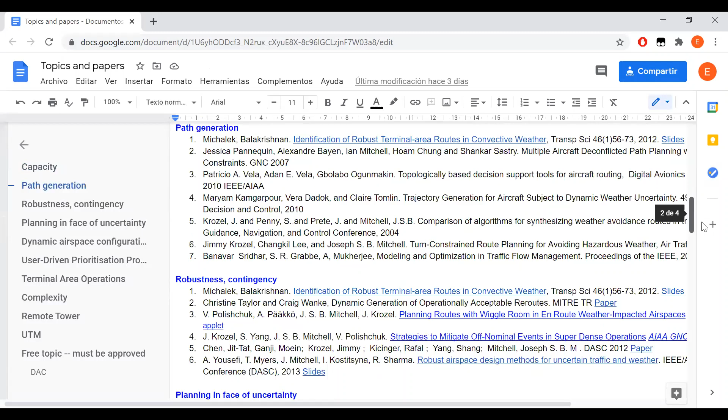This is the list. I'm gonna share the list with you so you can see it. So this is the list of topics, and for each topic we have a list of articles that you can choose from and read whatever interests you the most - capacity, path generation, robustness, etc. Okay, so you have this list with all the information.

And what I want you to do is to choose a topic and read some articles on that topic. And you must formulate a new optimization problem related to the topic. So this is the big part of this project. You will have to be creative with your problem. You have to come up with a new problem and formulate the optimization problem, etc.

So read about the topic, read a bunch of papers. You can, of course, be inspired by other problems to come up with your own, maybe making some modifications or adding new things. So yeah, come up with a new optimization problem and write your assignment about it.

So the new optimization problem that you choose or come up with must be relevant to ATM, of course. It must be based on the articles that you read. And if it's a small problem or something that's not very realistic, but that makes sense, that's okay. We are not expecting you to come up with a big project or anything. Just find something relevant to ATM and come up with an optimization problem about it.

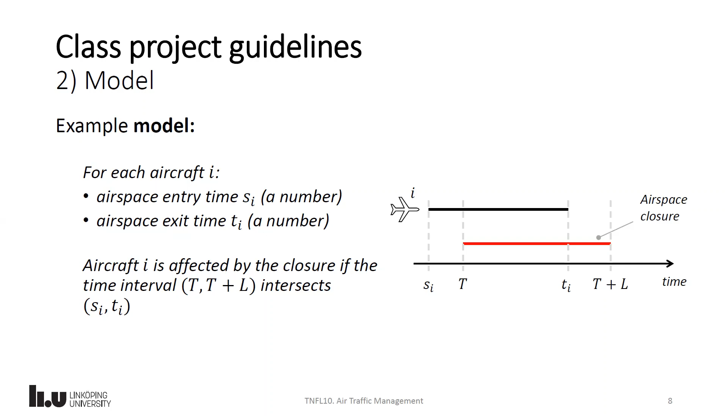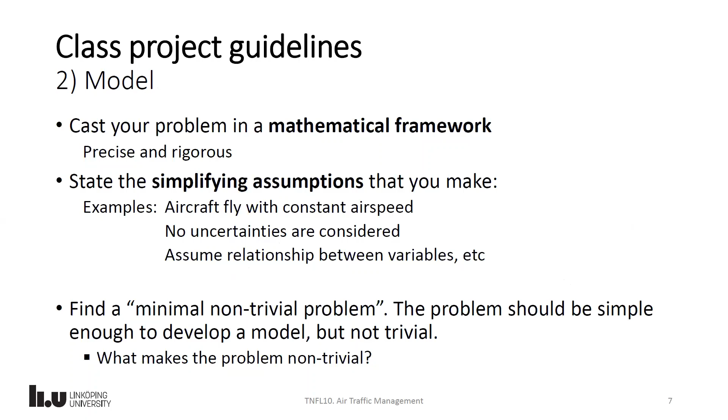Then we have the third part, which will be the problem statement. This is like the most important part of your project. Of course, the others are important too, particularly this one and the introduction. But the problem statement, because we spent a whole class talking about this, I expect you to do it very well. And also you have practice with homework too.

So this is an important part of the assignment. The problem statement is what we discussed in class already: the input, what kind of objects are given, any assumptions on the input. Then we have outputs, constraints, and objective function. All that we discussed last week.

You should build your problem gradually. You have two approaches. One would be to do what we did last week and start with a simple statement and build up from that. Another one is you can come up with a very difficult problem and start simplifying it. I find that this second thing is usually more common, to think of a very difficult problem, because ATM is a complex environment, so you always have to make simplifications in order to solve things.

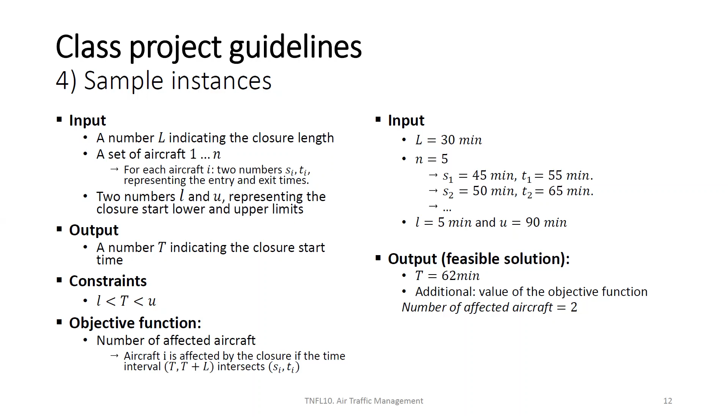And this is the example that we saw the other week, so I'm not going to talk much about it. Then we have the solution suggestions.

What would you suggest to solve the problem? What optimization techniques would you use? Of course, you don't have to solve your problem. That's something that in most cases is very difficult, so we don't expect you to do that. And also look at papers for ideas.

If you are basing your project on one or two papers, the most normal thing that will happen is that those papers already use optimization techniques. So you can suggest using those in your problem as well. This is not graded, because we haven't seen much about this and we have not worked with this. We are not going to grade your assignments on this, and you can skip this section entirely. And of course, crazy ideas are okay.

And finally, you must include the differences from the literature. First, on the model: how is your model different from those considered in the literature? For example, maybe in the literature the model is stochastic, but you simplify it and use a deterministic model, or dynamic versus static, etc. How does your model change from the article that you choose to base your project on?

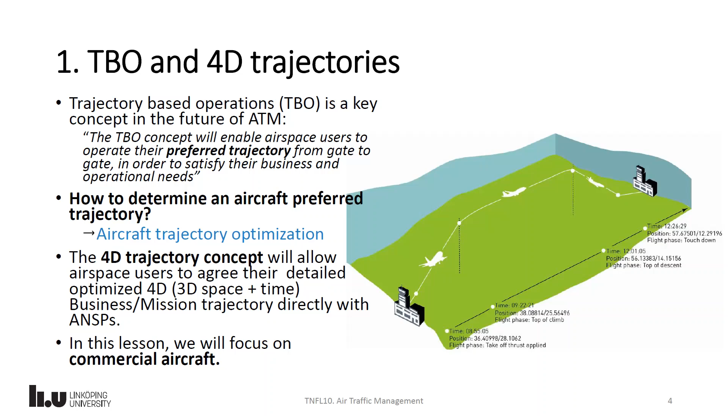So let's talk a little bit about flight mechanics. What is it and why is it important to aircraft trajectory optimization? Flight mechanics is the application of Newton's laws to the study of aircraft trajectories, which is also called performance, stability, and control. So how does the aircraft move? Equal to how we would apply Newton's laws to any kind of object on the ground or anywhere else. If we focus on aerial vehicles, we're talking about flight mechanics.

And flight mechanics in general includes also things like rockets, gliders, helicopters, all those kinds of aerial vehicles. But as I said, in this class we're going to focus on commercial aircraft. And there are two main parts of flight mechanics.

The first part—I'm going to start with the second one. The second one is stability and control, which is the study of the motion of the aircraft center of gravity relative to the ground and to the motion of the airplane. So this one is not so important for us. This is important for designing the aircraft and such.

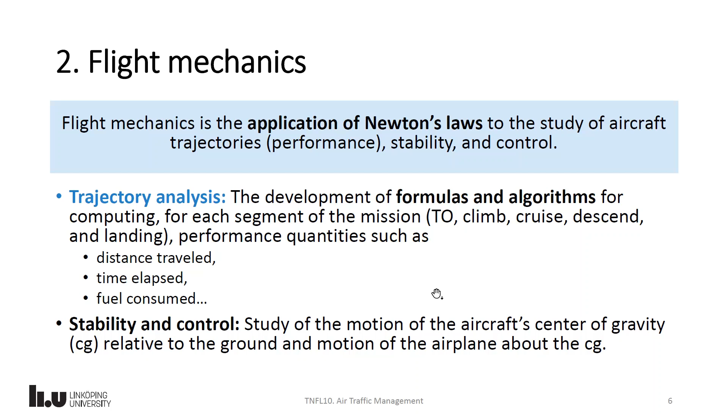And we have something in flight mechanics which is the point mass equations of motion, which gives us a relationship between the aircraft state—which is the position of the aircraft, the velocity of the aircraft, and the mass of the aircraft—and the forces affecting the aircraft.

In the context of our class, what we want to do is to formulate optimization problems. What flight mechanics would do is give us the model for the optimization problem and also give us the objective function. So if your objective function is the fuel consumed, for example, if you have a problem whose objective is minimizing the total fuel, your objective function will have to be constructed using tools from flight mechanics.

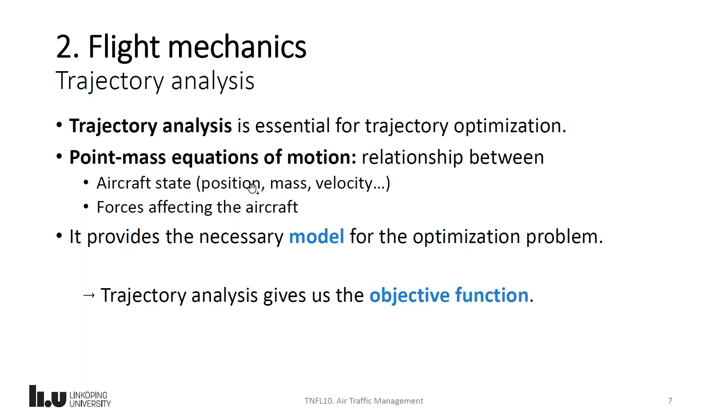Then you have the atmosphere model, because aircraft behave in a different way depending on the atmosphere they are in, depending on the temperature, the pressure, etc. In general, there is something called the International Standard Atmosphere that is used, but it can be any other atmosphere model that is needed. And then we have the aircraft model, which gives us an idea of how the propulsion works in that aircraft and what the aerodynamics are of that aircraft.

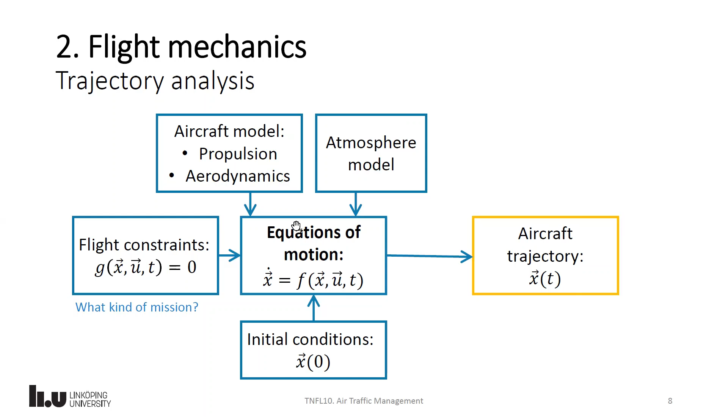So with all these four information boxes we have, we feed them to the equations of motion, and through integration we obtain the aircraft trajectory. This is a very complex topic, with a lot of equations, physics and mathematics, so it's not something we can cover today, but I just want you to know that this model of aircraft exists, and that this is what is behind aircraft trajectory optimization.

So just to give you an idea of how flight mechanics work, I want to give you some little concepts. Of course, this is not the subject of this course, so if you want, you can disconnect a little bit, but I think it's nice to know if you ever encounter this. In flight mechanics, the aircraft is considered a point at the center of gravity, which has 3 degrees of freedom, and there are 3 main forces that affect the aircraft.

The first one is the aircraft weight, which points toward the earth. Then we have the thrust of the engines, which goes in the same direction as the velocity of the aircraft. And also we have the aerodynamic forces, which allow the aircraft to fly. We have the lift, which is the force made by the wings going upward, and this is the force that keeps the aircraft in the air. And then we have the drag, which is the resistance of the air, basically.

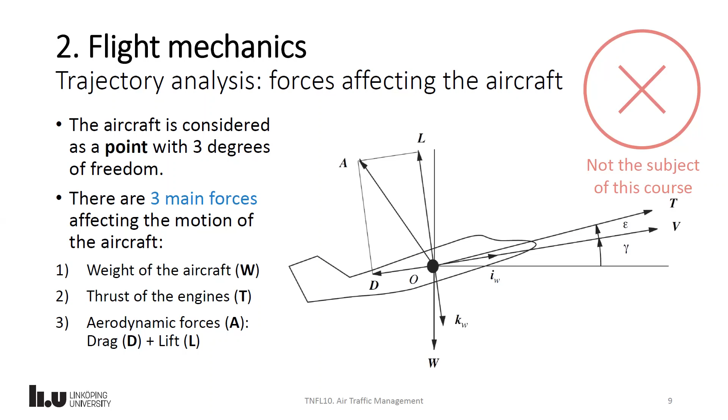If there were no drag at all, an aircraft could fly without stopping, the same as a car. I mean, we have a force that is making the aircraft slow down, so we need the thrust of the engine to counteract that force. So these are the 4 forces that affect the aircraft, and using the equations of flight mechanics, which look something like this, we can obtain the positions, the velocities, the orientation of the aircraft, and the weight, with these expressions.

Of course, this is not the subject of this course, but I want to give you an idea of what this kind of material is useful for. So if you, for example, want to know how far we are going to travel given a certain amount of fuel, you will have to integrate these equations in order to obtain that performance variable.

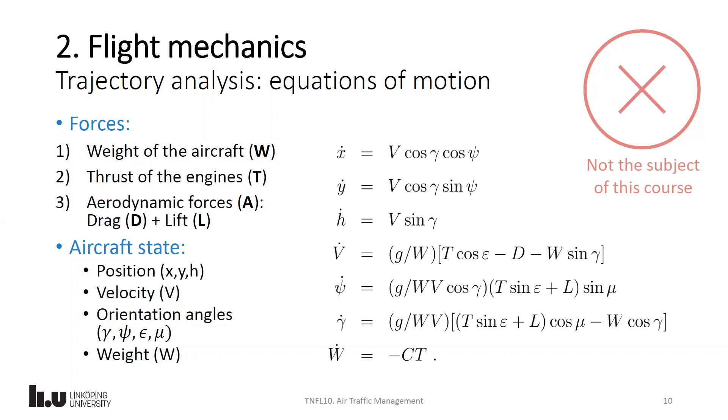So using flight mechanics, we can answer optimization questions like, for example, given a particular aircraft, a given atmosphere, and given initial conditions, what is the maximum distance we can fly given an amount of fuel? That's one optimization question we could formulate. Another could be, given an amount of fuel, what is the maximum time an aircraft can spend flying? Another optimization question could be, given a distance between 2 points, what is the minimum amount of fuel necessary to fly that distance?

Or, for example, given 2 points, A and B, what kind of mission, in general defining the velocity profile and the altitude profile, must the aircraft maintain to fly from A to B with minimum fuel? So all these questions can be answered through flight mechanics, and it's going to give us a model, an objective function, in order to answer them.

Another optimization question could be, given a particular mission, what kind of aircraft can fly the mission the fastest, longest, or with the minimum fuel consumption? This question falls into the realm of aircraft design. For example, to design the aircraft, we have to take into account the takeoff weight, the engine size, or the wing size. So which kind of aircraft is going to be the best for a particular mission? That is something aircraft design has to work with.

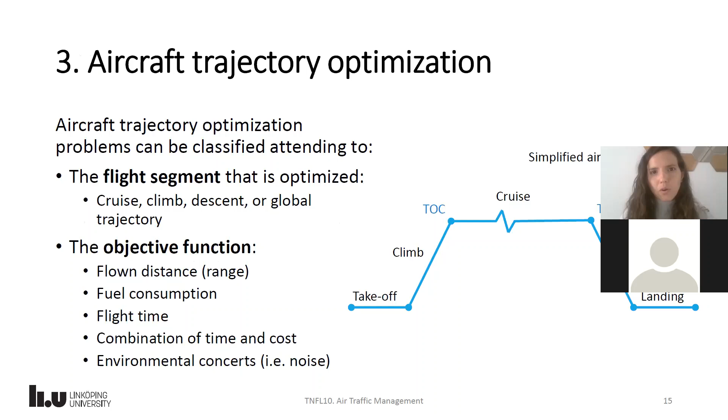Then we have aircraft trajectory optimization. So we can classify different trajectory optimization problems depending on whether we are in one flight segment or another.

In general, we can separate these 5 different segments, which are first takeoff, the climb, the cruise, the descent, and the landing. These points over here, the TOC, top of climb, and the TOD, top of descent, are points that I think we are going to be hearing a little bit about them.

They are the highest point of the climb, after which comes the cruise, and the top of descent is the higher point of the cruise, after which comes the descent. So basically the beginning and the end of the cruise segment.

Usually when we talk about trajectory optimization, a lot of work focuses on the cruise, some of them focus on climb and descent, and we don't focus on takeoff and landing. Why not? Because takeoff and landing take a very, very small part of the whole aircraft operation.

So if we want to optimize the use of fuel, we're going to be focusing more on cruise, climb, and descent than on the takeoff and landing phases. And in particular, the cruise is the longest part of a flight in general. So it's very common to focus our optimization efforts on that part of the cruise, okay? That is why I have this little thing over here to indicate that the cruise is much longer than this.

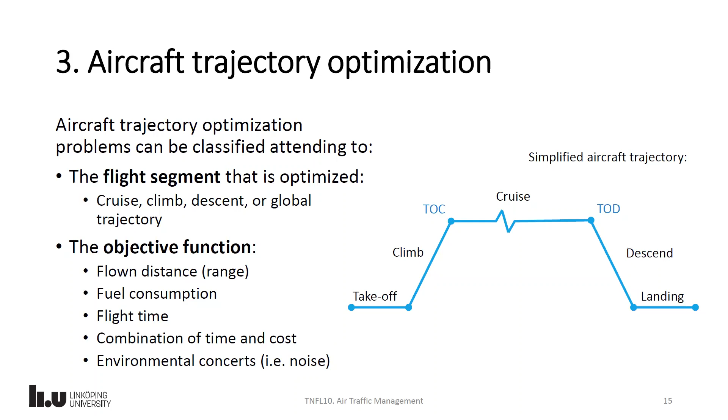So there are 2 main methods to tackle trajectory optimization, just so you know them when you see them. The first one is the parametric optimization theory, in which you take the variables of the trajectory and use them as parameters that can only take one single value from a given set.

For example, some parameters that you can use are the speeds, the altitudes of the waypoints of the trajectory, the angles at given points in both time and space. You can also use the trajectory waypoints coordinates, or the top of climb and top of descent. So just take given variables that describe the trajectory of the aircraft, and those are going to be your decision variables.

Then we have the optimal control theory, in which we no longer have variables that can take one single value, but the output of our problem are functions of time. Using optimal control theory, we can obtain functions like the position of the aircraft or the aircraft velocity as a function of time, and thus are the output of the optimization problem.

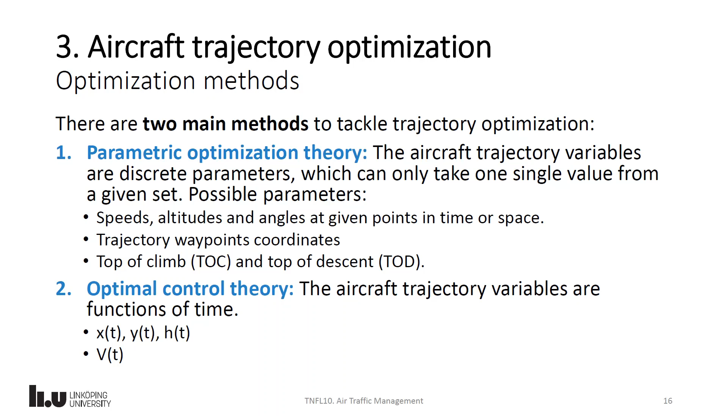If we look at the objective function, the most popular ones to consider are, of course, not the only ones. We saw that we can optimize while taking into account environmental reasons, or maybe flying the farthest. But the more popular ones, I would say, are minimum fuel, which is obvious. The objective is to perform the mission with minimum fuel consumption, and it has economical benefits for airlines and also reduces emissions. So this is a very popular objective function.

The other one would be minimum time. The objective is to perform the mission in the minimum time possible. It also has economical benefits for the airlines, for example in crew salaries, if they have to pay people less for being less time in the air. That's an economical advantage.

Not only fuel, so the cost of a flight does not only come from fuel. It also comes from the crew, and all the taxes that the airlines have to pay to fly over a given airspace. So for example, if an airspace is very expensive to fly on, they may want to fly over a different airspace, even if they pay more for fuel. So not always we try to think of minimum fuel — minimum time can also be beneficial, and it also gives us a better passenger experience. If you make the flights shorter, of course, it's a better experience for the passenger.

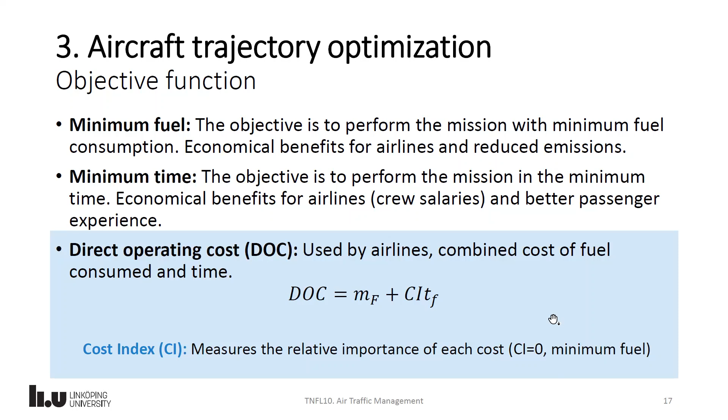The higher this cost index is, the more importance the time flown has on the cost of the operation. So airlines have to take into account both costs, and they try to decide what cost index is more beneficial for them — either they want to spend less on fuel, or they want to mitigate the costs of taking longer flights. This direct operating cost is a very commonly used objective function in trajectory optimization. This is something airlines use to optimize their trajectories, and if you look at research on trajectory optimization, you're going to see this direct operating cost a lot.

So this could be an example of an optimization problem for a single aircraft, using the notation and formulation we used in this class last week. The input of our problem would be a set of parameters and equations that give us the aerodynamic and propulsive aircraft model and also the atmosphere model. Then we have as input a set of equations indicating the flight segments and a vector of initial aircraft conditions. The output of our problem could be anything you can imagine, but for this particular example, the output could be a set of functions depending on time, which are the optimal Mach number and the optimal altitude profiles.

The flight constraints must be satisfied, which are this one over here, and the objective function could be, for example, the direct operating cost. So this is how a simple statement of the trajectory optimization problem in a way that we saw in class. Of course, in here we don't have the model. The model could be something very complicated and would be based on flight mechanics. But this is what our optimization problem would look like from what we saw in class.

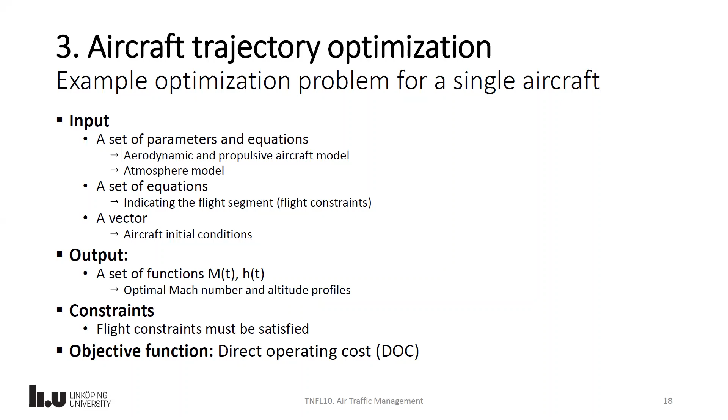Now we're going to see how we can optimize the different phases of the flight, which are cruise, climb, and descent. It has been proven, it's a result in the literature, that if you want to optimize your cruise, the optimal trajectory is something that is called a cruise climb.

From the definition, a cruise climb is a climb technique employed by an aircraft, usually at a constant power setting, resulting in an increase of altitude as the aircraft weight decreases. If you take those flight mechanics equations and optimize the direct operating cost, you obtain that the optimal trajectory for the aircraft to fly is a cruise climb. In a cruise climb, the aircraft is losing weight because it's spending fuel in their engines, and as the aircraft weighs less, it takes an ascending trajectory.

It has been proven that using this kind of trajectory, the fuel consumed and the time that it takes for the aircraft to fly is optimal. But as you can imagine, this cruise climb is very difficult to perform in an operational environment. Usually what is better to control, what is easiest to control for traffic controllers and for pilots, is to fly at a given flight level.

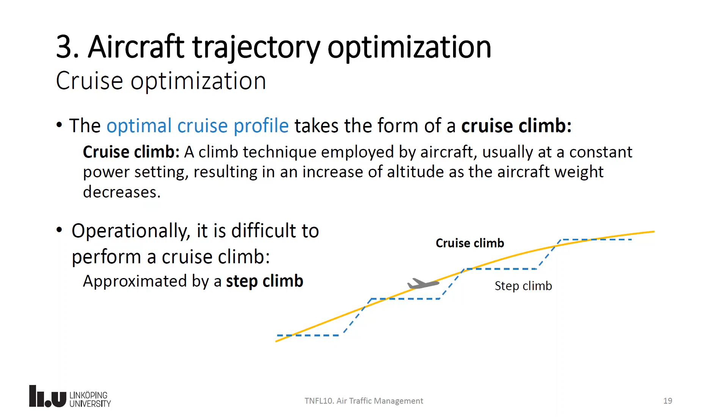So this is for the cruise. If we take a look at the climb and descent operations, it has been proven that the optimal vertical profiles take the form of continuous climbing and descending paths. From ICAO, we have these two definitions. ICAO didn't invent them, but they are two well-known concepts in aviation: continuous climb operations and continuous descent operations. These two are the optimal ways to both climb and descend.

Continuous climb operation is defined as an operation enabled by airspace design, procedure design, and ATC facilitation, in which a departing aircraft climbs without interruption to the greatest possible extent by employing optimum climb engine thrust at climb speed until reaching the cruise flight level.

And on the other hand, we have continuous descent operations, which is similarly defined: an operation enabled by airspace and procedure design and ATC facilitation, in which an arriving aircraft descends continuously to the greatest possible extent by employing minimum engine thrust, ideally in a low drag configuration, prior to the final approach fix or final approach point.

So what this means is that what the aircraft wants to do in order to consume the least fuel, in order to fly the most optimal flights, is to continuously climb or continuously descend. These kind of horizontal segments are not efficient for the aircraft. In particular, in the continuous descent operation, CDO, it's important to notice that the aircraft are going to be flying with minimum engine thrust.

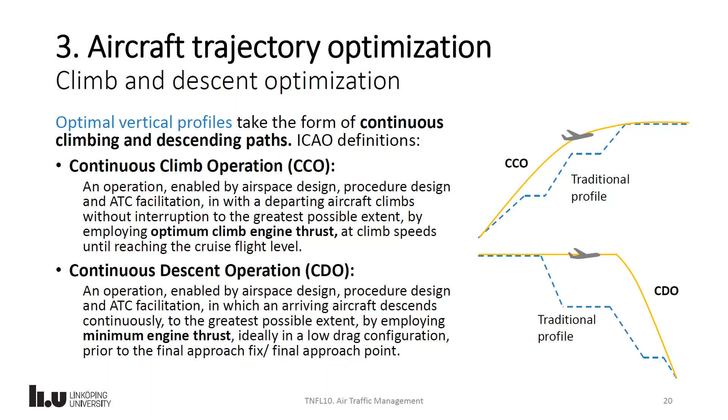Okay, so this is for continuous climb operation and continuous descent operation. These are some of the benefits: more fuel efficient operations, reduction in pilot and controller workload, because if you're doing a step climb or step descent you have to keep communication with air traffic controllers, telling them your flight level and descending points. But with continuous climb or descent operation, you just have to say this is my descent path, and that's it. Then we have a reduction in the number of required radio transmissions, a consequence of communicating positions and points much less.

Reduced fuel burn, aircraft noise mitigation. A potential benefit is that some flights aren't possible because they don't meet noise limitations, so by using continuous descent or climb operations and reducing noise, those aircraft would be able to fly, so more flights could be accommodated. Then we have more efficient use of airspace and more consistent flight paths and stabilized approach paths. These are benefits that ICAO has identified for continuous climb and descent operations.

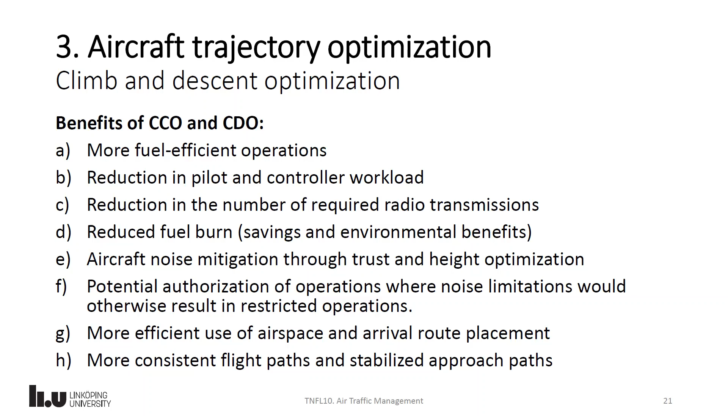So as you can imagine, this is what the ATM community wants to achieve, that all aircraft end up flying continuous climb and continuous descent operations. There was a study done by Eurocontrol in 2018 in all the countries of the ECAC, and they found that for continuous climb operations, 94% of flights in the European area currently fly continuous climb to flight level 100, and 74% fly with full continuous climb operation to the top of climb. These numbers are quite big, 74% of flights flying continuous climb operation is a big achievement, and that's something Europe and SESAR have been working on, and I think it's giving some benefits already.

Then from continuous descent operation, on the other hand, they found this number was much lower. They concluded that 41% of flights fly continuous descent operation from flight level 75, which they identify as the top of noise CDO, and only 24% of flights fly continuous descent operation from the actual top of descent, which they call the top of descent for fuel. So they identify two tops: the lower one, which is the noise one. I assume that over flight level 75, the noise is not too disrupting to the population.

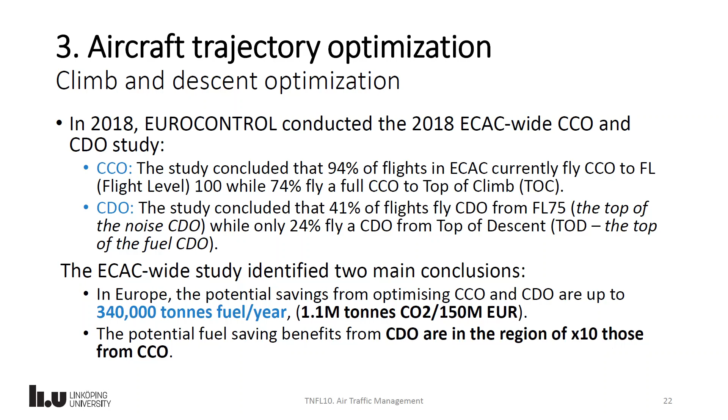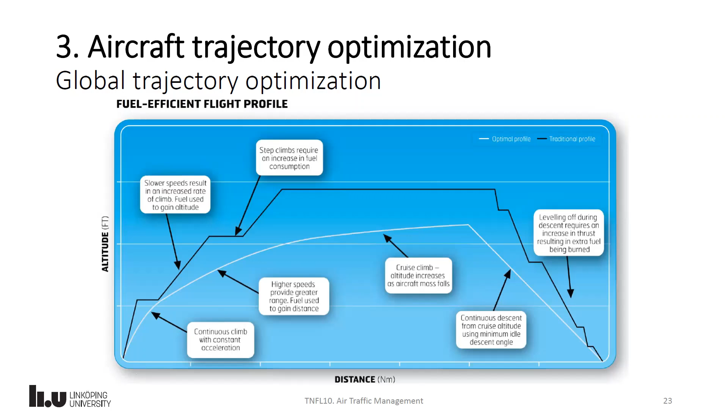Yes, so that's all for trajectory optimization. I'm going to talk a little bit about aircraft conflict detection and resolution, and also about trajectory optimization and their meteorological conditions. These are going to be just a couple of short slides.

As I just said, aircraft trajectories are already optimized. They know how to fly those trajectories. So our task as researchers or as workers in ATM is to accommodate those optimized trajectories to the constraints that the ATM system imposes. And one of those constraints is the conflict between aircraft. So because aircraft do not fly alone in the airspace, we must construct trajectories that are conflict-free.

So I will give you the definition of a conflict. A conflict between two aircraft exists when a set of separation minima is predicted to be violated in the future. That means that we have a horizontal distance requirement, usually named with the letter D, and a vertical distance H.

You can think that aircraft are surrounded by protected zones, and those zones must not overlap. If these protected zones overlap, we say that the aircraft are in conflict. Or if these protected zones are predicted to overlap in the future, we also say the aircraft are in conflict. The work of an air traffic controller is to prevent these losses of separation, to prevent these conflicts from occurring. So aircraft trajectory optimization must take into consideration that trajectories must be conflict-free.

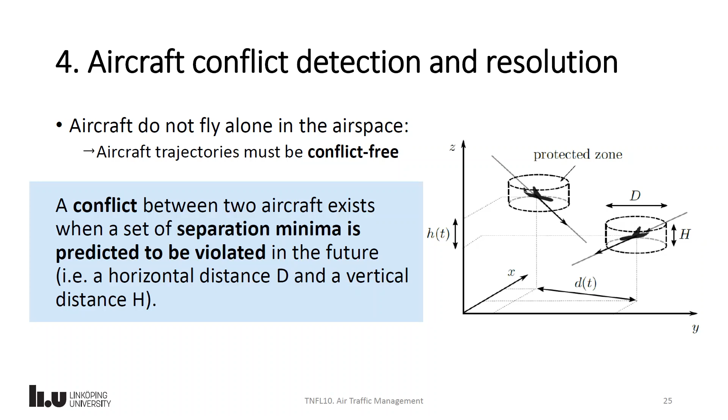But if we want to optimize the trajectories, if we want to fly with continuous climbs, if we want to fly with cruise climbs, we have to take into consideration other kinds of techniques, other kinds of measures to prevent those conflicts.

So this could be an example of the optimization problem as we saw in class, but now for multiple aircraft. The inputs are the same, but we have added a new input: instead of one aircraft, we have a set of aircraft, which goes from 1 to n. The output is the same — we want to obtain the optimal Mach numbers and the optimal altitude profiles for all aircraft. But now we have added a new constraint, which is that the aircraft trajectories must be conflict-free.

And the objective function, instead of being the direct operating cost of one aircraft, is the sum of the DOCs for each individual aircraft. So the most important change we made when considering multiple aircraft is that the trajectories must be conflict-free.

And this is not an easy topic, because in scenarios where there is a lot of traffic demand, or a lot of traffic in general, this can be very difficult, and in some cases it might even be impossible.

So this is where air traffic flow and capacity management comes into play, by delaying some flights or rerouting them. So this is a very relevant topic, to optimize trajectories while also maintaining safety in the airspace by keeping conflict-free trajectories.

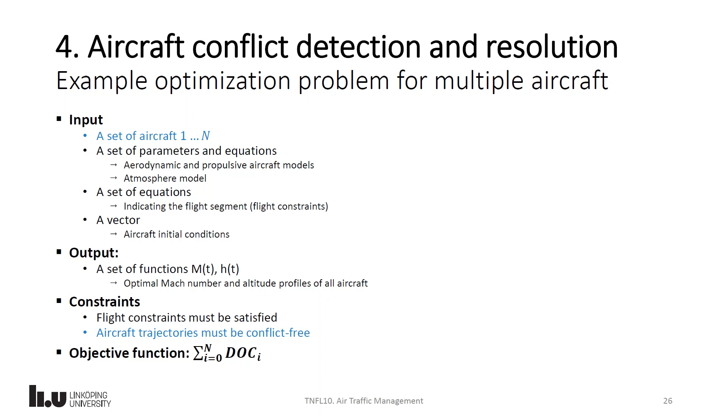This is an example of a paper that tackles trajectory optimization while also having conflict-free trajectories. This example considers optimal conflict-free trajectories in a terminal maneuvering area of an airport. So we have the terminal maneuvering area, depicted with little blue lines, and then we have all the waypoints that are inside this terminal maneuvering area.

So the output of the optimization problem in this particular paper is the coordinates, or trajectory waypoints. So the output is a sequence of waypoints that the aircraft must follow, and the objective function is the deviation from the nominal trajectories.

They consider that the aircraft trajectories are already — if the aircraft were to fly in the airspace, they would have a nominal trajectory that is optimal for them. So what they want to do is minimize the deviation of the resolution trajectories from those nominal trajectories that are already optimal. So they come up with trajectories that are like this, as you can see.

So these little circles — the asterisks are the positions of the aircraft, and the little circles around them are the protected zones. I remind you, if these protected zones were to overlap, we would have a conflict. So you can see that as time passes, the aircraft follow a given trajectory, and we have a converging point over here.

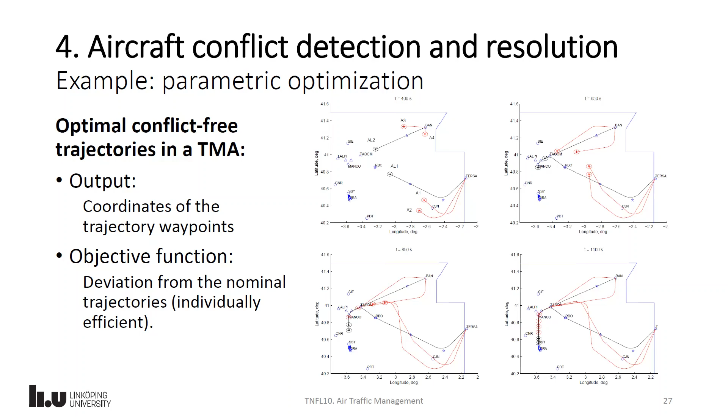And then finally, we have trajectory optimization under meteorological conditions. As you know, weather is very significant in aviation, in aspects like safety, and what we tackle in this lesson, efficiency.

Aircraft trajectories are going to be affected by meteorology, by weather, and there are two main weather phenomena that affect the trajectories. First, we have winds. The winds affect aircraft trajectories by modifying their ground speeds.

So basically, an aircraft has two speeds. First, they have the airspeed, which is the speed of the aircraft with respect to the air, with respect to the mass of air that is surrounding the aircraft. That is what the aircraft feels, what the engines feel, what the engines are working against, the density of that air, the one that's feeding the engines. The velocimeter in the avionic panel is going to indicate that airspeed.

Imagine a boat. The airspeed would be the equivalent of the velocity of that boat with respect to the water. And then we have the ground speed. The ground speed is the speed with respect to the ground, so that could be the thing that we would observe from the ground if we look at an airplane. And the difference between the airspeed and the ground speed is the wind.

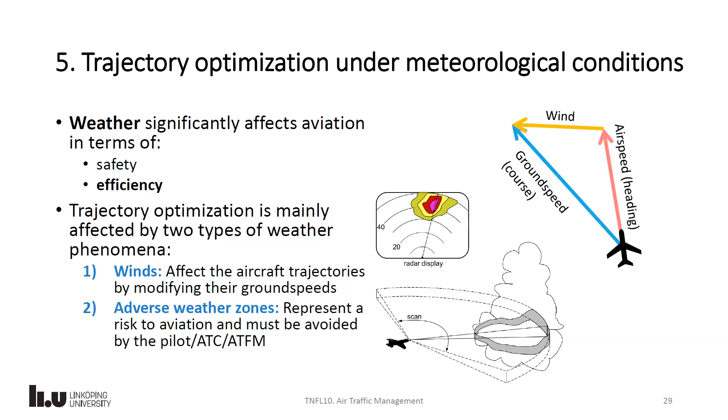So these two weather phenomena affect a lot the aircraft trajectories. Let's start with the wind.

If we try to incorporate winds into our optimization problem, it will come in the form of an input. We will have to consider not only the atmosphere and the aircraft models and the equation of the flight segment, etc., but also as an input we would have to consider the wind map, what the wind looks like, what the wind the aircraft is going to encounter will look like. And this wind needs to be incorporated in the model, so the direct operating cost must take into account the influence of the wind.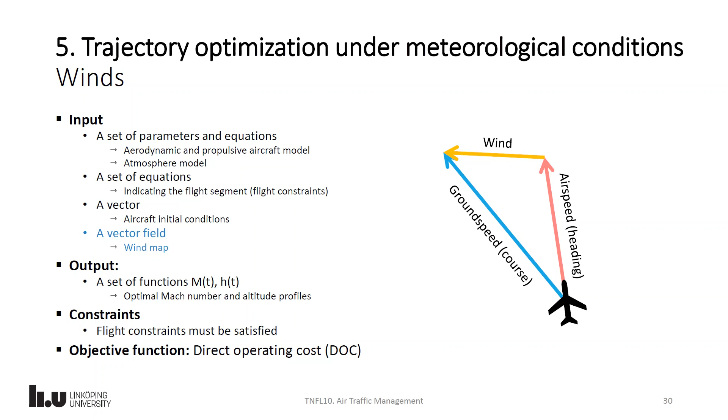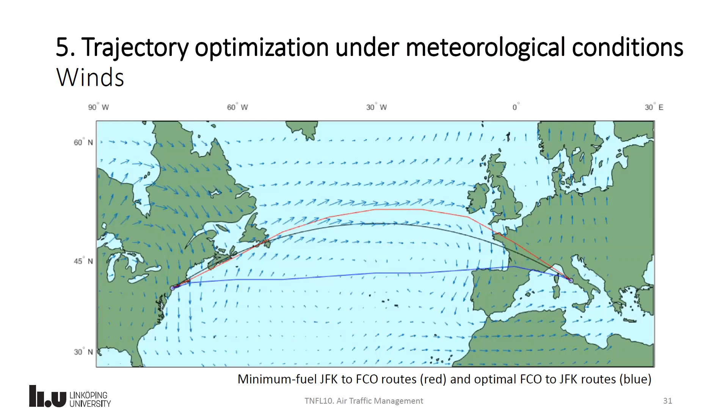How to deviate from those weather cells is again something that is not easy. It's a topic that is being researched now. If you want to know more, just go to the bibliography or ask me about it. There's a lot of research done around these topics about weather in general in aircraft trajectories.

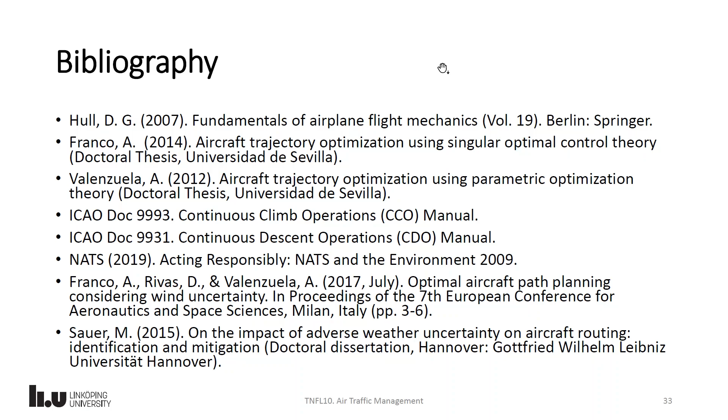Okay, I guess that means you don't have questions and everything's great. Do you have any questions about the project or the homeworks? Not now. Do you go first, Erik? No, I just said I don't have any.

Okay, so we can't do, as you said, anything from what we did in homework 1. So we have to find a subject that isn't made up of any of the persons in our group from homework 1 in the group project. No, it mustn't be the same problem, but you can work around that topic. So if you worked on, say, TMA in homework 1, you can still work with that topic. What you cannot do is use exactly the same optimization problem. You can add to that problem, make some simplifications, or just make something new. You can use the same topics, so if you want to use those same topics from homework 1 or 2, feel free to do so. Okay, thank you.